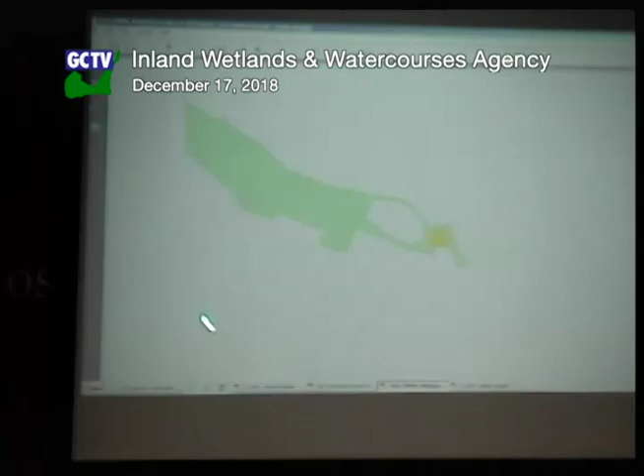So the site plan itself, if you don't mind ticking ahead, please, Doreen. Although it has a variety of different elements, the crux of the project is to demolish and reconstruct the lower school on the campus, together with a whole host of different pieces of site work that go along with it. But one of the things we're doing is... there we go, right here. Oh, it's still the existing one. There you go, that's the one. That's good.

Some years ago, the Academy purchased the property at 2 Patterson Avenue, here on the corner of Patterson and North Maple. In addition, obviously, it historically was a single-family residence. It's not occupied now. Part of the proposal calls for the demolition and removal of that house, attendant structures, and site work associated with it, and replacing it with landscaping and green space, which Bill can describe further.

There is also the property at 176. It's all part of the overall 33-acre campus, but the residence at 176 North Maple, which has historically been used as the residence for the facilities director, is also proposed to be demolished and removed.

As a matter of housekeeping, in place of what's shown on your current site plans, we had originally proposed a paved permanent parking lot there. Since submitting to the Wetlands Agency, we've revised the plan, so what is currently on file with the Planning and Zoning Commission differs. In deference to one of the neighbors in the area, after speaking with them, we've removed that permanent paved parking area and instead are calling for a grass overflow parking area in that same vicinity, with screening around the perimeter, mostly the southern perimeter and the eastern perimeter where the road is. So it's a change to what you've got in your file now.

The other wetland system I'd like to describe is a watercourse. It's primarily a watercourse system with a bordering wetland whose cover type varies along its length. It flows in from the west, similar to the flow going to the pond, flows through a forested area here, and then comes down.

This whole area, both of these wetland systems, had been significantly manipulated and degraded and managed over many, many decades when this property was part of the Rockefeller estate. So they made this pond and manipulated this watercourse, which passes through some walls, with some short segments of stone culverts in here.

So it comes down a forested segment, passes through a very large retaining wall in this area. For this length, it runs through a lawn area, where there's very little watercourse characteristics, just flowing through the lawn. Then at the southwest corner of the existing parking lot, the wetland ends, and the water from that watercourse and wetland enters a pipe.

This pipe has been in for many decades. It predates the 1985 permit that was granted for the expansion of the parking lot. The pipe extends from the eastern end of that wetland all the way north below a wetland area, and then ends at the property line where there's another pipe that extends further north from there.

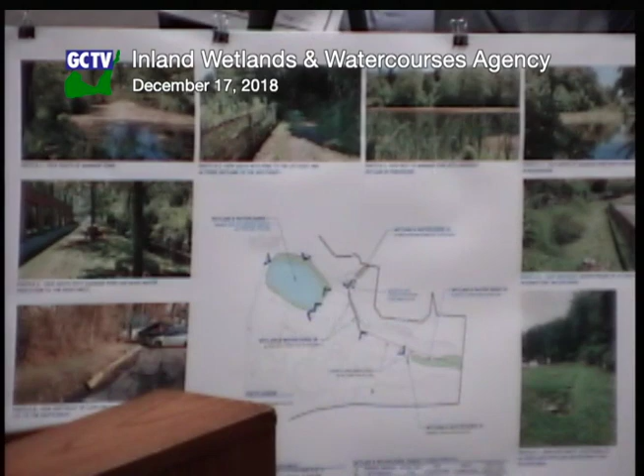With regard to alternatives, the first is to do nothing, not raise the parking lot, and leave it at its current elevation in this area that's already man-made and disturbed. The next alternative is to build a retaining wall right against the parking lot. We felt that given the improvements happening elsewhere and the existing conditions of this wetland, not unlike what happened at Brunswick School with the proposed tunnel below King Street where there were drained, low-functioning wetlands, it's a similar situation. The agency reviewed and approved impacts there when the proposal included substantial creation of new wetland and enhancement of existing wetlands.

So one alternative was to do nothing. Another is to construct a fairly substantial retaining wall right here. And then there is the preferred alternative: to do this plan with all the enhancements that are proposed.

Is the parking lot being increased? The size of it is increasing slightly — the northerly curb line is being shifted slightly to the north, maybe 5 feet. Not in the wetland area though — the parking lot doesn't extend into the wetland. There's no increase into that area; this is strictly to address the berm issue, correct? Yes. So is there no other way to do that?

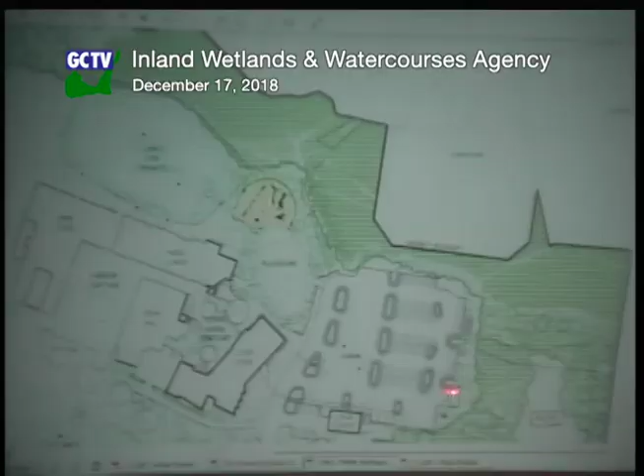Very good. One other modification between when this application was submitted to you and submitted to P&Z is the location of some proposed dumpsters that were about 60-70 feet from the wetland — they are no longer being proposed in this location. They're being kept in their current location on other parts of the campus, far more than 100 feet from any wetland.

Okay, how about the questions in Fritz's letter? Well, we want to let Mr. Fritz come up and make his own comments and then have him respond. Do we have any other comments or questions from the agency?

Yeah, Bill, the wetland that comes in from the west, is that pipe now, and you're taking it out of the pipe? It is not piped here. But yes, you can see the two photos on this side, are images of that. One is looking from the parking lot looking to the west. This one's from the west looking east towards the parking lot. You can see the playground equipment right up against this.

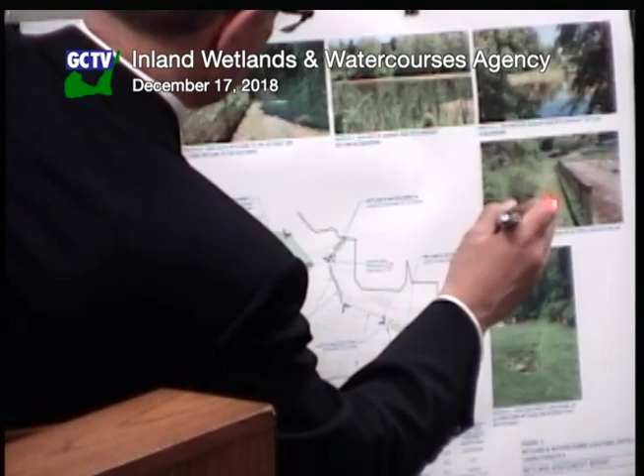Okay, one question. The forested slope from the, what is it, Midland area, Midwood Road area, it comes down toward the pond and toward that area. Any water quality issues with what comes off that slope?

If there are, it's going to be more of a problem with this watercourse. This watercourse, I believe, discharges from a pipe in this area, and there's a number, it picks up quite a few homes and runoff from streets. So the pond, there's no surface discharge pipe or anything like that that I've seen. So it's filtering through that forest, the forest vegetation and soils, and making its way to the pond. Certainly, there are some residential landscapes running through that, but its water source is being better filtered than this water source that's coming down this way.

Okay, and just regarding the parking, there was a question. That north parking lot goes from 181 to 192.

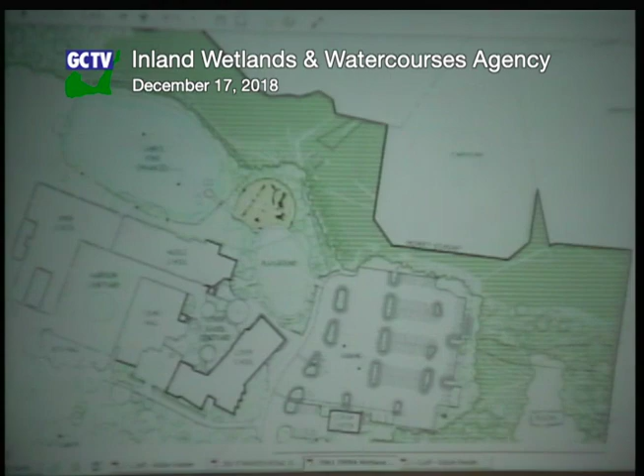My name is Don Fritz. I live at 300 North Maple, which is over here. Okay, so as you see, I border that. I guess I'll just refer you to my comment there, that I felt the consultants very subtly suggest that they don't anticipate significant adverse effects to the wetlands.

They also, at the beginning, suggest that water quality volume and runoff reduction volumes and peak flow control are warranted. So I'm asking you, with that in mind, plus the fact that this system is now 35 years old, and 35 years ago the issue was raised. There was a letter to Headmaster Yule by somebody called Aurelia, who may be here. The point was that the agency expressed concern that activity in the wetlands may affect neighboring properties. So that was 35 years ago. My point is, 35 years on, what have we learned and what can we apply?

So again, I'm asking that maybe if there's any way to look at what alternatives may be interjected here, or what safety margins may be added, I'd appreciate it. I really had three questions. The first one, very broadly, there's three. I always get these terms mixed up.

There's three watersheds, right, on the site. One goes south, as they said, into a little wetland down here, and then it's all underground from there, basically to Richards, as I understand. There's another wetland here, which drains this way into a storm system, and then there's the northern side, which goes this way.

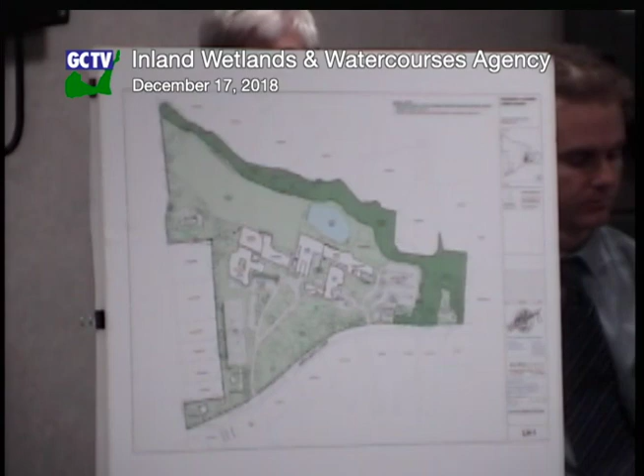But any water that could be moved in that direction would be beneficial. I think there is an opportunity to refine it to take a little bit more water towards that end. The drainage manual looks to have the existing watersheds maintained. Yeah, that is true, very good. And I'm pretty sure that people at the end of Francine Drive don't want any more water directed to the east.

Are there any other public comments on this application? Okay, I think we're in a position to leave the application open, public hearing open. So we will look forward to seeing you again. I think we have a bunch of stuff to talk about: the pond dredging, the aeration, the wetland creation, and removing the tile pipe, amongst others. Thank you.

One question: we didn't ask how many cubic yards get brought in to raise that parking lot 7 feet. Ask Bob. Bob, the number of cubic yards of fill to be brought in to raise the parking lot 7 feet, that's got to be a lot of fill. Yeah, it's mostly crushed stone, but yeah. Well, whatever, that's a number I think we ought to see next time, some idea, order of magnitude.

And the applicant, since October, has revised their plan. They have gotten rid of the 150-foot diameter lot-shaped circles from the lots, which has allowed them to straighten out the lot line and push the southern house toward the road away from the wetland, increasing the separating distance to 60 feet from the prior 33 feet from the patio that was shown on this conceptual house.

The whole question of whether this lot circle can be eliminated will have to be determined by the planning and zoning board of appeals, and Mr. Mills will be speaking to that this evening.

The other issue was the width of the proposed buffer. Previously the buffer was squeezed down to maybe 8 to 11 feet wide, maybe even a little less at the north, and now the buffer's a minimum 15 feet wide, 15 to 20 feet wide, with that section in the middle where it goes out over 30 feet. Boulder demarcation is now proposed at the edge of this wider buffer, and Mr. McManus provided a supplement to his wetlands assessment with a list of appropriate species that he thinks would be good to plant in the buffer at the time these lots are developed, in order to enhance the buffer and the wetland. DPW has reviewed the plans and they're acceptable for their purposes at this stage of the subdivision process.

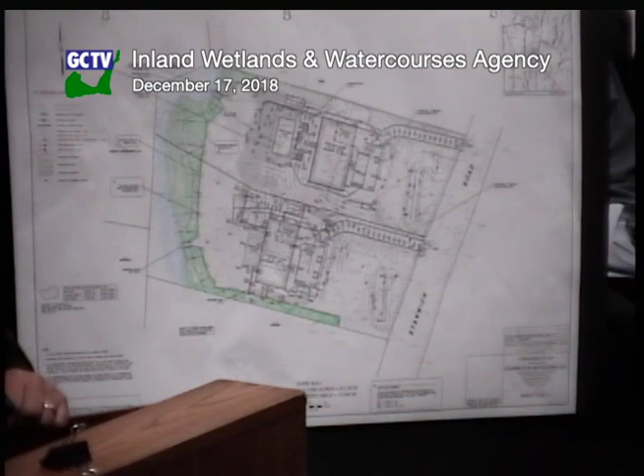Mr. Mills said at October's meeting something about this lot, about the time when it was created, that it could have been a straight line, but then trying to abide by the current regulation, circles got involved. We're putting the deed history together for the Planning and Zoning Commission. The Miller property included land to the south and to the north. There are old surveys at SE Minor of different configurations when it moved around. When somebody added the last piece from the south to make it exactly 2 acres, they had in mind that it would work to the decimal point in terms of acreage, frontage, lot width, everything else. The lot circle, I don't know if that was contemplated, depending on what date it was created. It goes back at least to the 70s when this lot was configured.

Very good. Do you have a motion, please? I'll make the motion to approve as proposed. No, no. If the ZBA doesn't approve it the way it is, they have to come back with a new plan. Can I have a second? All in favor? Aye. Thank you very much.

2018-139, 94 Pecksland Road, SE Minor for 94 Pecksland Road LLC, subdivision of the property, construction of a residence on the empty lot 84 feet from the wetland.

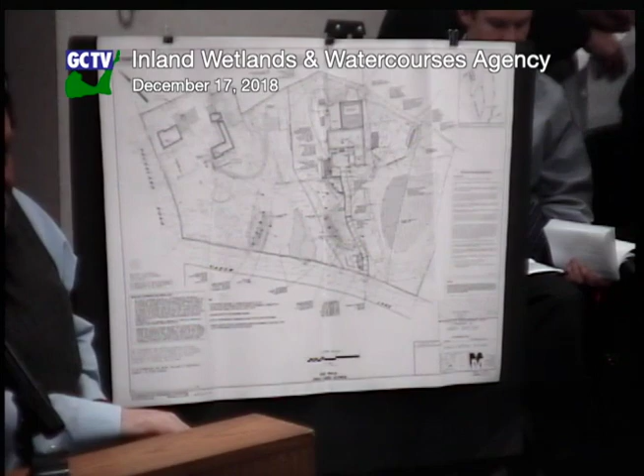We got revised plans sort of late in the game last week. I believe I sent them in your packet; if not, Mr. Liebman has the plan and can discuss it. He is here tonight to get feedback from the agency on any remaining issues. There are no conditions of approval, so we'll be brought up to speed by Mr. Liebman. Good evening, Mr. Chairman, members of the agency, Larry Liebman from SE Minor.

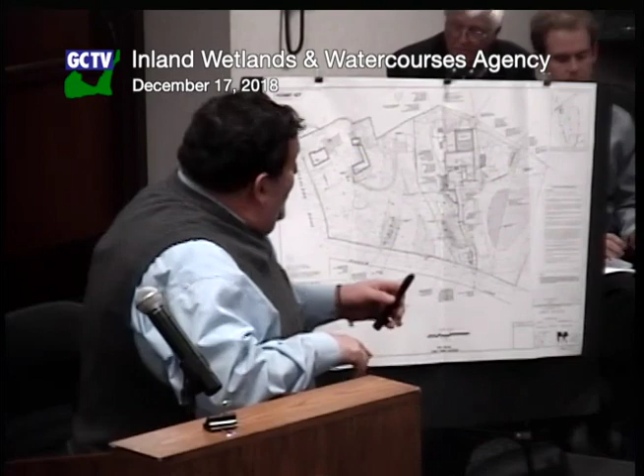We have taken this project and you guys have really helped us evolve it. The 650-foot long driveway is no longer part of the application. The main lot, Lot 1, is going to come in from the existing curb cut. The lot line has been revised to keep the entire wetland together; we're not bifurcating the wetland into two places, which was something that was recommended. There's a 10-foot walkway going down, which is a planning and zoning requirement.

I'd like to state publicly and for the record that we are not seeking a permit for the second lot at all. The second lot, when it is developed, when it needs to come before you, it'll be a separate application.

We found some interesting things when we started going through the building. There's a photograph from the early 1900s that I'll share with everybody in the package, of this house, that says 'Grandpa Euston's House.' The applicant wants to get rid of all of the extra things that were added to it and just refurbish Grandpa Euston's house, which we think is very unique because it's an old founding member of the town of Greenwich.

The only activity we've moved within the 100-foot upland review area on Lot A is a little bit of grading for the backside of the septic system. We wanted to put the septic system in the best possible location so there weren't any issues. We did remove and shift the septic tank to avoid the trees, as was also stated. We've also put a border around the wetlands that aren't going into open space, and we're going to offer that to the agency as a conservation easement area, so that whole meadow area is completely protected forever and in perpetuity.

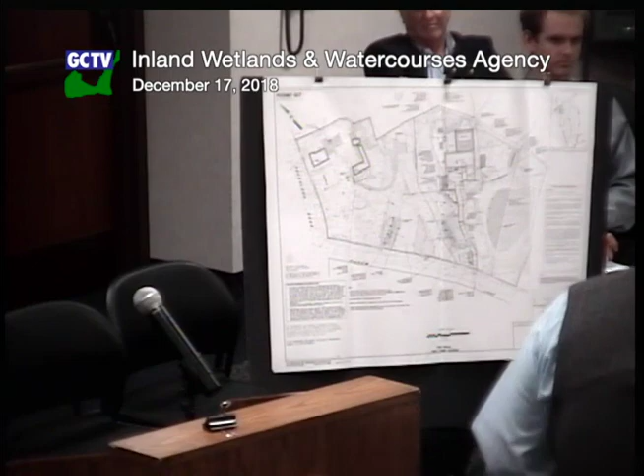We are still waiting to hear back from DPW. I know there aren't conditions written, but the project is also going through the planning and zoning process where DPW is going to review it as well, and hopefully they'll be approving it. There is an issue about a fee, an extra $2,000 filing fee that I can give to staff, which I received today from the applicant.

So really we're removing impervious surfaces on the lot that we're seeking a permit for. I know we don't like to use those terms, but it is a conceptual approval for a subdivision, or a subdivision application. If you guys would like to wait until next month, after Mr. Marucci does his part, that's your prerogative. If not, the planning and zoning process will take it through the engineering department as well. I'm here to note any other questions you may have if we need to revise the plans further. Thank you. Any questions or comments?

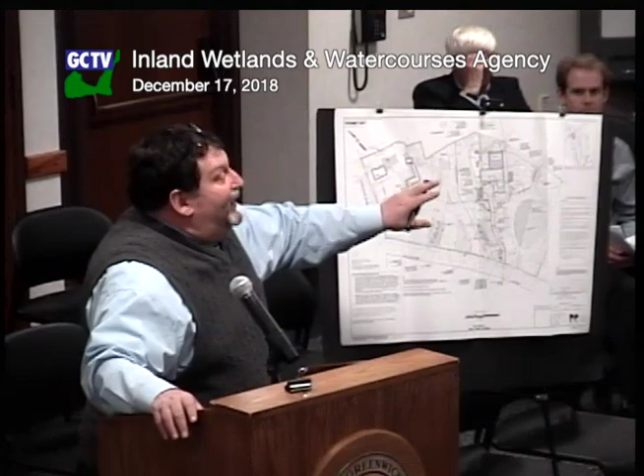But what's the alternative? They have the right to present the max FAR. They have the right to do that, yes. But if presenting that means we scrutinize it less now thinking we'll catch it next time, regardless of the characterization of it being conceptual, I think we're vigilant to that anyway. And we're not recommending that we don't look at the other lot because that's not what's going to be built. What I've presented to you is what I would consider the worst-case scenario, the furthest impacts. It has a swimming pool, large patios, everything, a maximum building on it.

Let me retract what I said. I'm not looking for a conceptual approval. I'm looking for a subdivision approval from the Wetlands Agency. And if any changes come back at a later date, they have to come back to this agency, which would happen regardless. So to eliminate the conceptual part of it, let's eliminate the conceptual part of it and say we're seeking subdivision approval for two lots. Then that is what you were doing. I'm not, but I am not seeking a full-fledged permit on the second lot.

I think my way is more important than that. We hash it all out, we say this is good or not good, so if that property owner ultimately has a buyer that can work within that development envelope and within those things, they get the sign off, they go. They don't have to come back to us, they don't have to get anything else. And we can write conditions that pertain to one lot or the other. Not a big deal to do. So this agency reviews it once, and if something changes that doesn't fit into the scope of that original permit, then you come back.

I agree with all of that. Does Larry have to come up with any additional information to accomplish that? Not having reviewed the plans from the end of last week, I don't know. So why don't we leave it between you and staff to work out exactly what it is you're going to get. Fine, okay? Yes, sir, good.

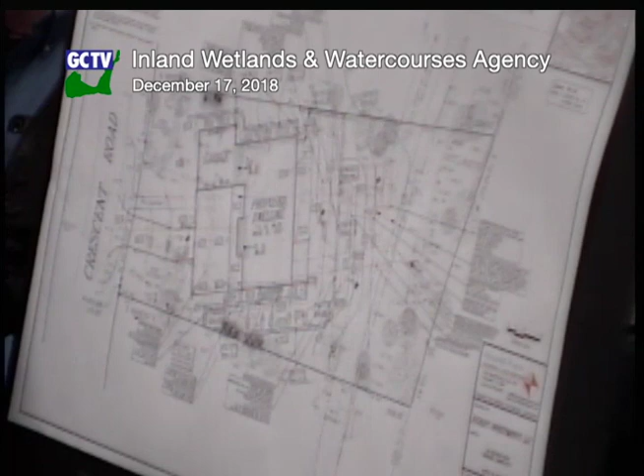The drainage calculations are taking credit for removal of the gravel driveway in the calculation of net impervious coverage before and after. The property owner has stated that they've received verbal agreement from two of the other owners who share the right-of-way to allow him to remove the portion on his property. We're not going to get into whether that's sufficient, but I will say that if this is approved tonight, which I'm recommending you approve it with the conditions provided, if it turns out they have to maintain that gravel road, they're then going to have to come back to us and confirm that the drainage system is sufficient.

It won't be a paved increase, it'll be a gravel increase. I'm also recommending a permanent demarcation feature 10 feet off the western and northern edge of the wetland, pulling the footing drain to that limit, and maintaining the buffer as a meadow, mowed no more than once a year. And there's some stuff in the wetland, cut brush and other materials that ought to be removed immediately.

So Mr. Muller's here. I don't know if he wants to go into the right-of-way issue or just accept my recommendation of approval.

Hi, Brian Muller here for the record, professional engineer in the state of Connecticut, Soundview Engineers, representing the client. I don't really want to get into the right-of-way. Obviously, if we can't close it out, we're going to come back and we'll have to provide more drainage, or at least redo the calculations to show we're reducing peak flows and providing water quality. I have no problems with any of Mr. Clossy's recommendations. I will beef up the erosion control fence on the eastern side of the existing right-of-way, and make that part of our final construction drawings that we'll be submitting to him, along with addressing DPW's comments, which I will be addressing in the next week.

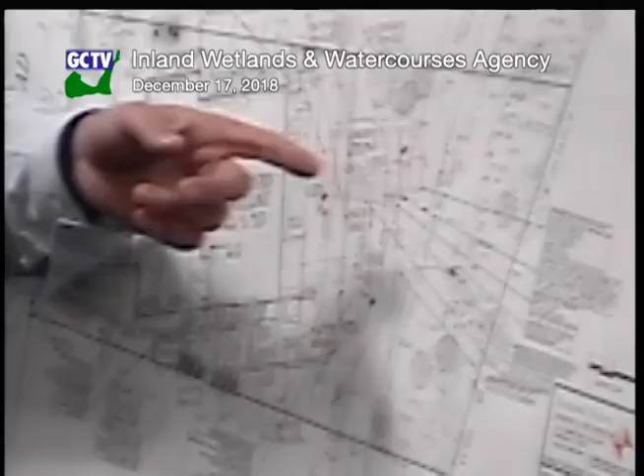The entire site, all the new impervious area out here, is going to pass through this rain garden and then overflow to a Cultec system for peak flows. So all the new impervious on the site will be provided water quality treatment before it enters the wetlands.

Hello, everybody. I'm Keith Werner from Onum & Kirby, professional engineer. We're the engineers and surveyors of record for 12 Hillcrest. I think Mr. Cossie summarized what's going on at the site very well. It's just a one-story addition off the back of the house, some deck modifications, and reconfiguration of the driveway. As you can see, there's wetlands flagged on the southern edge of the property, running from east to west, and we propose to minimize site disturbance and trap all sediment and maintain a healthy site throughout construction.

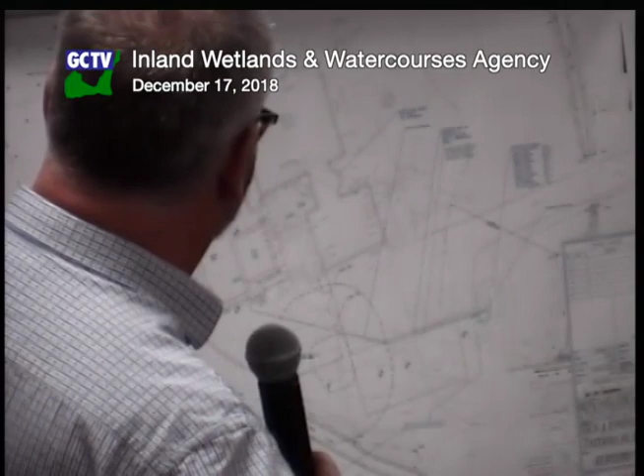No. Good evening, Jim McTighe from Rizzoli Engineering. So as Bob pointed out, the proposal in front of you is for some pool and patio behind the residence.

We have a very limited property. We have a stream that runs through the front yard, another stream that runs through the backyard, and we received permission from you guys to do an addition to the house, and then subsequently we reconstructed the septic system in the only place that we had that met the 60-foot setback, and it required crossing that, and you guys gave us permission to do that. That was successfully implemented, and that went well.

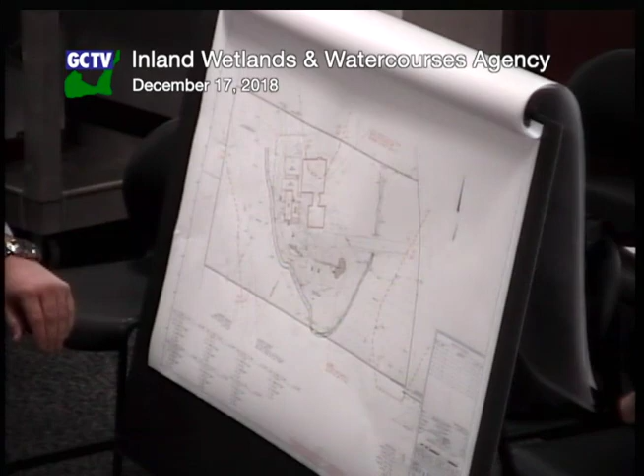So the clients right now, the only usable yard that they have for a private space is right here behind the house. There is a historic demarcation, this rail fence, that is going to be maintained, and it comes all the way around the site, all the way out here to the front. All of our activity is within the developed envelope. This fence has been here a long time. I don't know how long it's been here, but it has been here a long time.

So we're looking to just provide some patios, and due to the grade changes, we've dropped the patios down to make the elevations work and to cascade down the hill, and we're looking to just do a small pool in this area. We have pool equipment off here on the backside. And in regards to your questions on the drainage, Bob, we're proposing a rain garden over here. The rain garden does have a liner. The soils are Class D soils, which you're not allowed to infiltrate into, hence the rain garden with a liner.

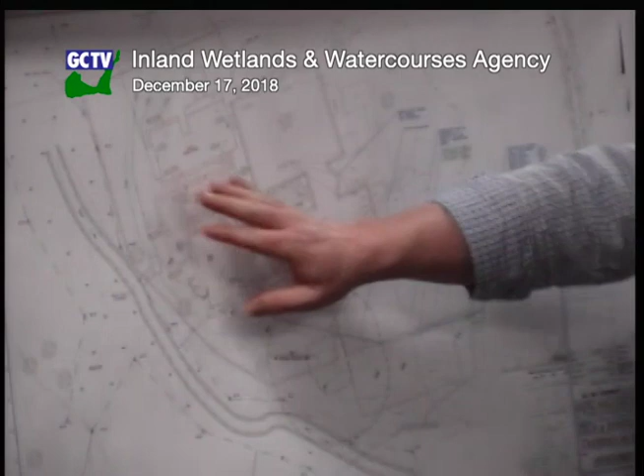And in lieu of doing a system behind the house, we're looking to pick up all the roof leaders on the residence and put them into the rain garden to renovate the water and cool it down before we release it. And then anything that falls on the patios here would just sheet flow off into the wetlands.

But how does that reduce the runoff volume? You're increasing impervious coverage by more than 1,000 square feet. I think it's like 2,000. Right, but this was the house that had a small addition, a 500 square foot addition. So most of the residence was an existing condition. And the area of the pool and the patios is smaller than the residence, so we're picking the residence up as an offset rather than picking the patios up.

And the site is tight. We have a septic tank and pump chamber here. I can't have any drainage within 25 feet of them. I can't have any drainage within 10 feet of a wall or a pool per the town drainage manual. So placing structures underneath the patios becomes very difficult. This is going to be a fireplace here, and we have retaining walls and retaining walls. So getting a Cultec underneath the patios would be very difficult, just from a practical, horizontal separation issue.

And we'll be glad to provide you with the environmental assessment. Can I suggest that you confer with Mr. Marucci about that? I have an appointment with him on Wednesday. Okay, because I'd still like infiltration behind the house explored. We can look into that some further for you.

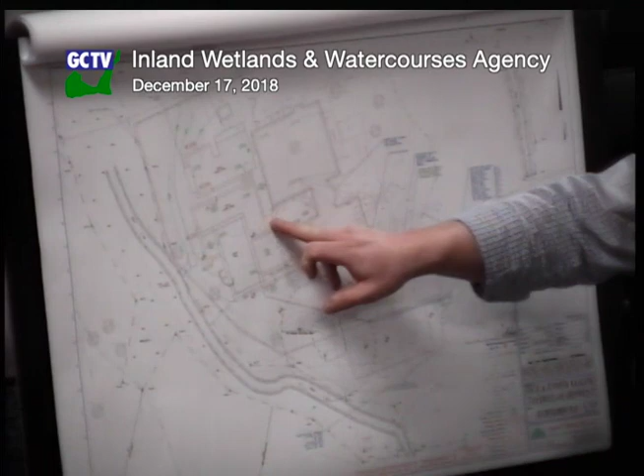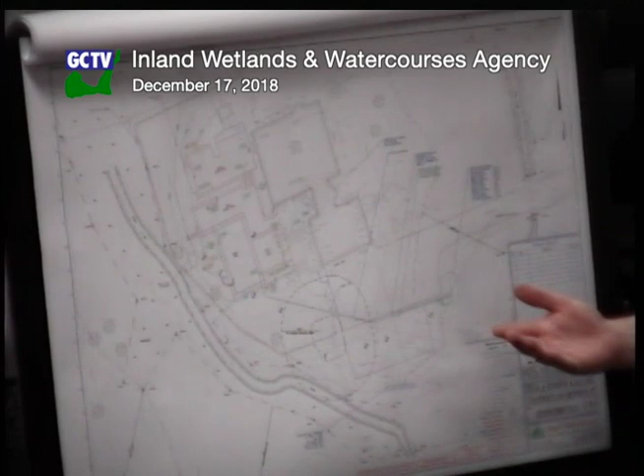Any other questions? So, I guess there's always the question as to why the patios have to be quite so extensive. This is a 10 scale plan. This is a lawn panel. This is going to be a stone patio, and this is going to be a stone patio. But these aren't big areas. These are like maybe 12 by 14, 12 by 14. This is barely even 10 feet wide. So it's a 10 scale plan. They're really not big patios, and this is not a big pool.

Okay, applications to be received. Can I have a motion to receive that? Before we move on, I was able to get a hold of Matt Kopp, representative for Aquarion, regarding 2018-143, and he is authorizing the extension. Very good, thank you.

So you need a motion to delay, motion to delay 2018-143, cover our bases. I make such a motion. Can I have a second? Second. All in favor? Bases covered.

Make a motion to receive applications 1 through 7 as delineated on the agenda, in the orange agenda sheet. So moved. All in favor? Violations. I'm sorry, are there any questions about the agent approval?